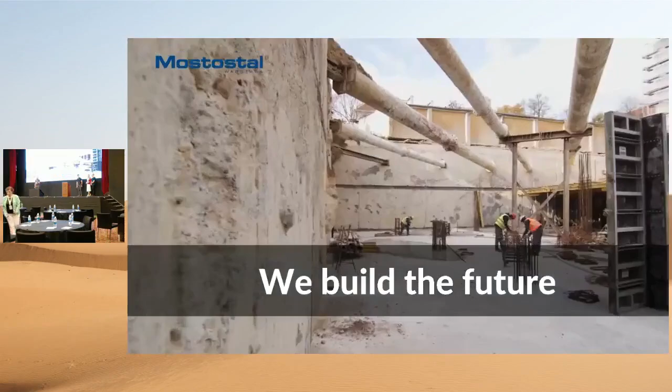We represent a construction company called Mostostal, which undertakes all types of construction projects. Our motto is "We build the future," which we realize through the implementation of digital tools and execution of European research projects. Our company's fundamental values are innovation, safety, and teamwork. And all these values were taken into account in the projects we are discussing.

To develop our solutions, we worked for over 3 years together with experts in different fields. The entire project was coordinated by Universidad Politécnica de Valencia, and our role was to prepare requirements from the end-user perspective, prepare IFC files, carry out the demonstration, test, and validate the technology.

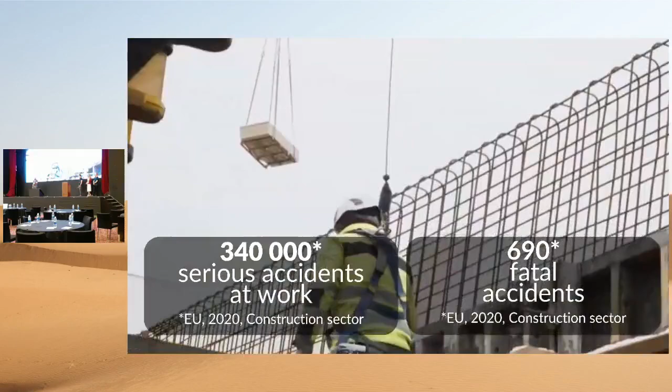The construction industry is one of the most dangerous sectors with very high numbers of serious and fatal accidents. A construction site is a dynamically changing work environment. Additionally, due to high numbers of frequently rotated workers, it's very difficult to supervise them. Our goal was to develop a tool for continuous monitoring of construction site safety, providing alerts about potentially dangerous situations. We achieved that by connecting BIM models and information about the currently dangerous zones with an Internet of Things platform and implementing AI.

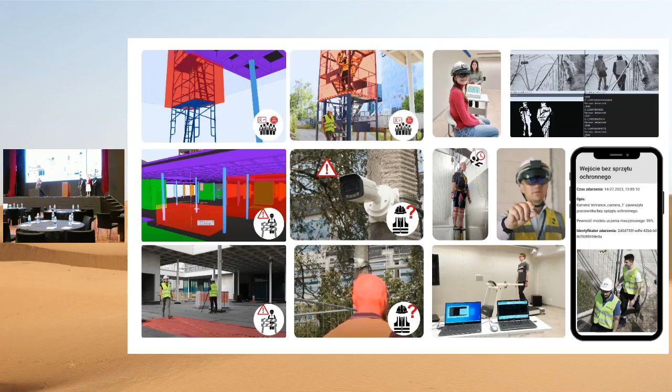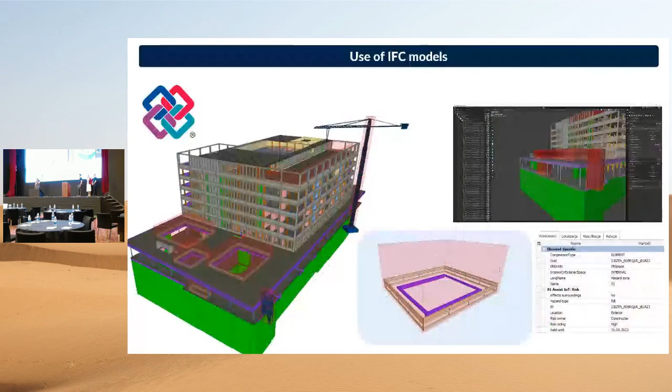Before we cover our use cases in detail, let's move to our construction site in Warsaw. This contract had very extensive BIM requirements from the investor. We had to rely on buildingSMART standards, which are the foundation of our digital strategy. Thanks to openBIM, it was possible to develop such ambitious and complex solutions for health and safety. We use IFC models for classification developed for this project, including, for example, hazard types. We use point clouds and 360 photos to create as-built documentation and models. To maintain the quality and accuracy of the model, we utilize communication in BCF format on a CDE platform.

It's standard practice in our company that we implement on each construction project a CDE platform for health and safety reporting. Based on the collected data, we display it in Power BI, and thanks to this, we can conduct analysis and draw new conclusions related to health and safety. And now, here's Witold to tell you more about these activities and other use cases on this project.

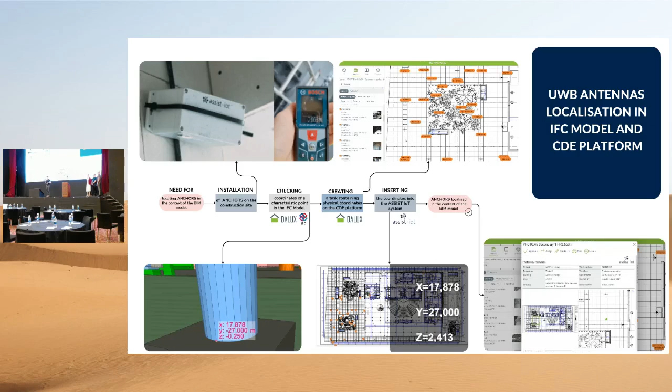Thank you. So I will continue by showcasing how we went above and beyond in creating our innovation. Our use cases are a direct response to hazardous situations present at construction sites. And of course, at the core of the Internet of Things is the hardware. We developed custom equipment that computed data from sensors at the construction site. We processed real-time images from a camera, for example. Additionally, we used ultra-wideband antennas for the localization of incidents. Here, the combination of physical measurements and coordinates read from the IFC model and tasks in a common data environment allowed us to have a localization system up and running.

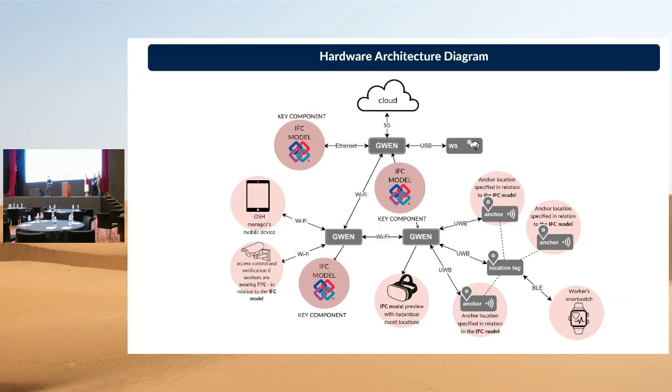All workers were equipped with a location tag, as well as a smartwatch that served as an interface for worker-specific alerting. And for the OSH manager, there was a dashboard created for a tablet where he received all the alerts. Of course, connectivity and software integration of these tools were established to then create one Internet of Things.

And now moving to particular use cases. To assure workers' health and safety, we measured the pulse of the workers. In case of abnormalities, both the worker and the OSH manager were alerted. Here, importantly, the alerts contained the location of the incident as well as the affected workers' data.

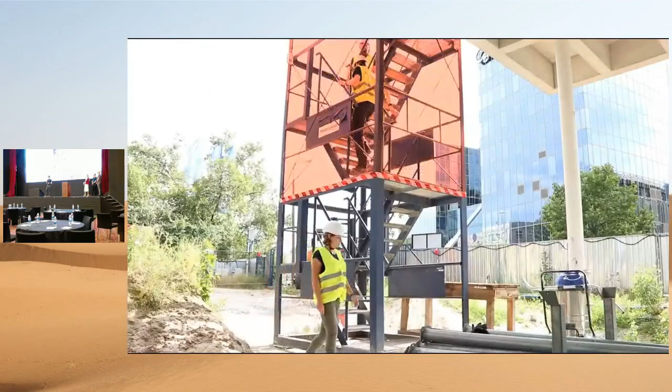We were also able to detect entry into modeled danger zones. The integration of IFC danger zones parameterized with type of danger as well as validity date allowed us to inform workers about the active dangers present at the construction site. Here, to further streamline the process of modeling danger zones, we modeled them natively in IFC. This was important to keep the models up to date.

We successfully used freeware here, exactly BlenderBIM Bonsai, and then thanks to open collaboration, an application was developed which allowed creation of zones on a tablet, also with direct integration to the Internet of Things. As an extension of the geofencing use case, we were able to check workers' permissions upon entry into a zone.

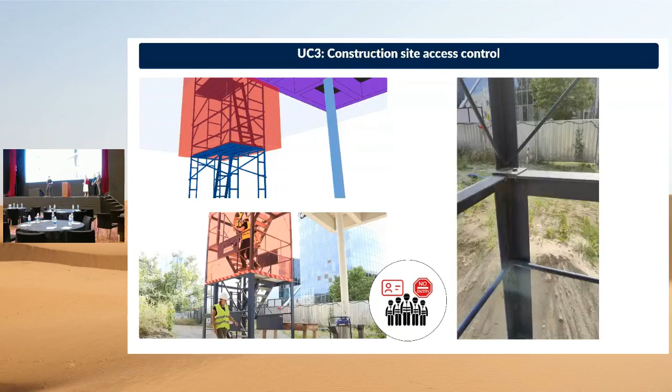Also, thanks to a camera capturing pictures at the construction site and a custom AI algorithm, we were also able to detect workers entering construction sites without a protective helmet. Here also an alert was issued. One of the challenges that we encountered was the algorithm having problems with differing between a bald head and a helmet, but we fortunately overcame that.

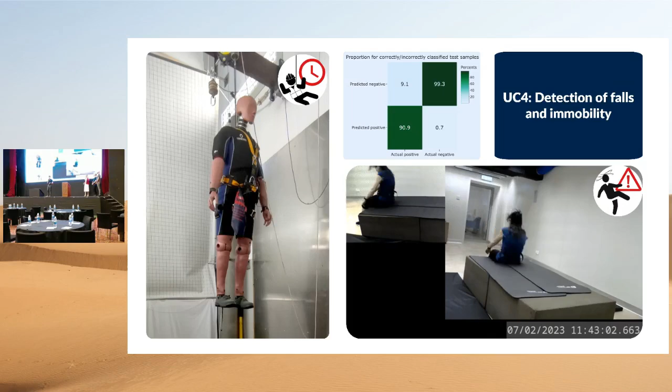Thanks to an accelerometer integrated in the location tag, we fed and trained an AI algorithm for fall detection. Both falls from height and falls from the same surface were detected. And here, crucially, both neural networks and knowledge graphs were used to provide a reliable algorithm.

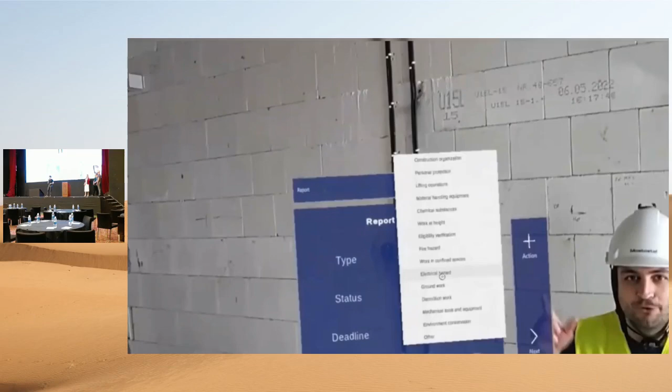Then, as a further step in digitalization, we moved report creation to an augmented reality interface. This was, of course, conveniently integrated with the localization system and the IFC model. We also explored marking an evacuation route in an IFC model for the AR interface.

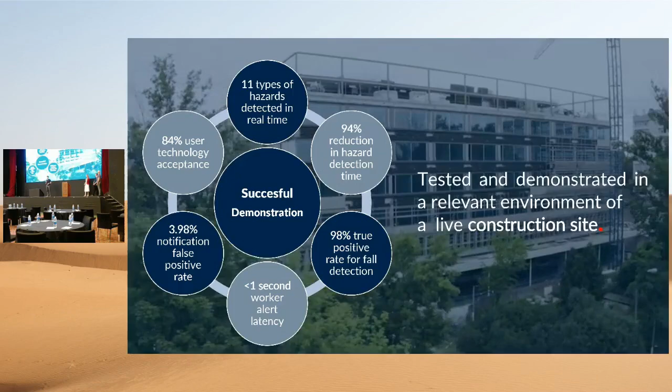So, in summary of the use cases, we tested and demonstrated our solutions in a relevant environment of a live construction site. We achieved high user technology acceptance, low latency, and low false positive rates. We successfully proved the concept of an IoT utilizing integration of an IFC model for the real-time support of occupational health and safety.

And by implementing open standards every step of the way, including openBIM, but also open standards for connectivity, for software creation, we assured high scalability. This means that this platform that we develop could be easily extended for any other use case. Now I'll give floor to Agata.

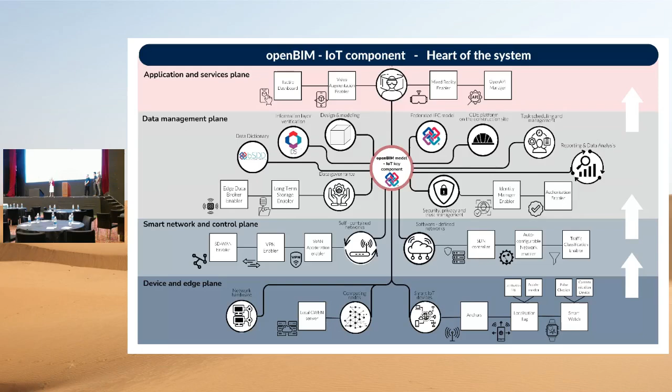The openBIM standards were applied across various areas of the project, including design and modeling, the use of CDE platform on the construction site, as well as mixed reality. Especially the use of BCF, bSDD, and IDS were triggers that powered the IFC model of the building, functioning like one of the heart chambers.

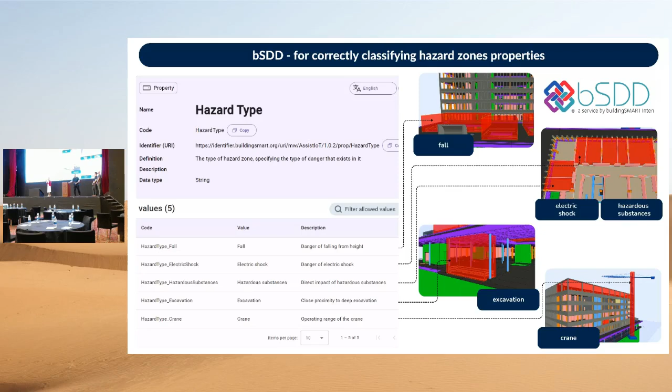In the model, we included elements typical for the construction site environment, focusing on hazard zones. Here, the bSDD service proved helpful. By creating our dictionary, we ensured that all model elements were correctly classified. Properties assigned to all hazard zones, crucial from the perspective of construction workers' health and safety, included, for example, hazard type, valid until, and risk rating.

We used Akka bSDD editor to create our dictionary that we then uploaded to the bSDD service website. The publication of the bSDD allowed Mostostal Warszawa as the first organization from Poland to appear on the list of entities using the bSDD service. At the moment, we have 5 different buildingSMART data dictionaries published.

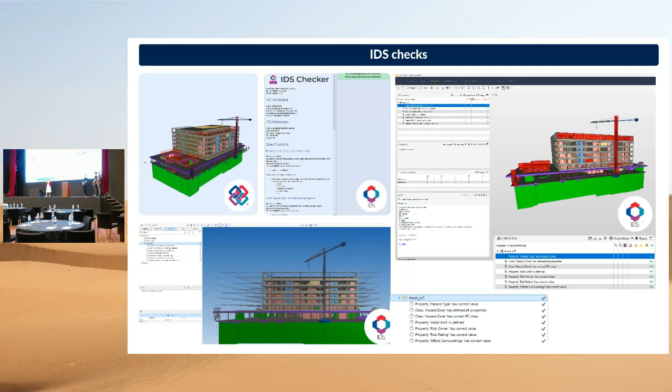The information layer of the IFC model was then verified using IDS specifications. In the process of creating IDS, we directly referenced classes previously created in the bSDD. For example, we checked whether the hazard type has the correct value from the list of hazard types, and also if the hazard zone has its duration defined.

Different IDS files were then uploaded into different software, BIM Vision Program, Solibri Office, and BIMcollab Zoom, providing us with verification reports. Heading towards the conclusion, we have transitioned from OSH reporting on paper into reporting it on CDE. And now we are developing AI-based real-time reporting with the use of augmented reality. None of this could have been achieved without the use of openBIM. That makes the solution open and accessible.

But what is the significance of our project that makes it not only a research work, but also a research work with a very concrete, practical, and implementation dimension? This is what Dawid will introduce you to.

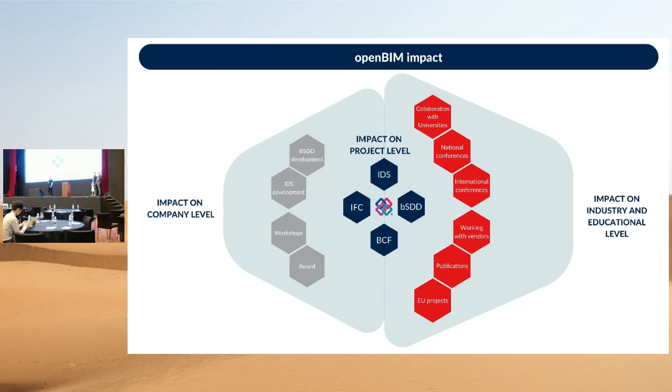So by placing openBIM standards at the center, we brought many benefits on project and company level, including developing bSDD and IDS for other projects also.

At the educational and industry level, we contribute to the Building Smart Poland annual report and the Collier's report addressing digital sustainability challenges. Also, the project resulted in many interdisciplinary publications, bringing in meaningful academic results.

For many years, we are involved and focus on transferring practical knowledge to the students. We organize workshops where they can use our IFC models, and we like to teach them about openBIM standards used in practice.

We presented achievements at both national and international conferences. Also, we actively promote the use of openBIM standards in the Polish market, and we work together with software vendors to create and improve better software for all users.

Key openBIM outcomes cannot go hand in hand without addressing sustainability aspects. We align our solutions with 7 of them. In conclusion, our project supports both research and practical benefits, for example, open access to results, gender balance in research, and impact on high-quality education.

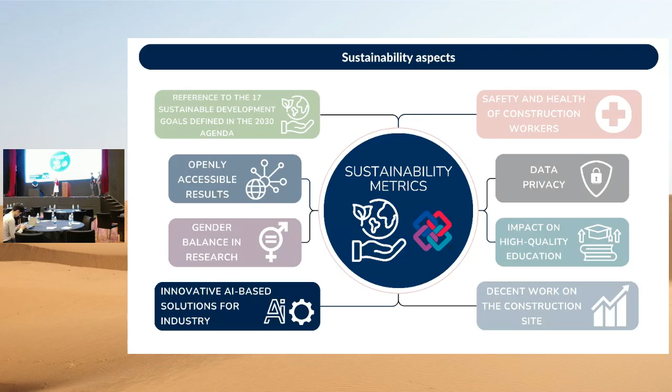Sustainable development in the context of the built environment is widely understood as recycling and reuse of building materials. Nevertheless, it must be highlighted that it is humans that sustainable goals are aimed at and for. Construction workers' safe and decent work on the construction site that the project contributes to are directly aimed at construction workers, that is, at humans, their health and their lives.

Thank you very much for your attention.

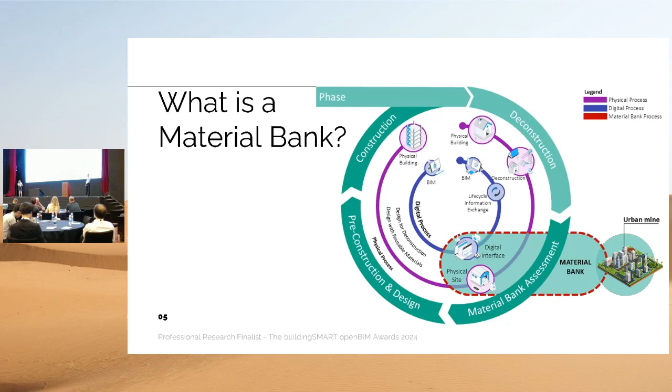But also on the digital side, we want to communicate this information to designers, practitioners, and contractors to be able to find these reusable items and use them in their projects. So we need visibility. This project actually started 6 years ago.

So in 2018, BIM was still a little bit new. And we asked a futuristic question, how to connect the building information model to a material bank. And that was in 2018.

We didn't really have an information model for this use case. We also didn't have a material bank. We just knew that in the future, designers are going to consult a material bank and find reusable elements from them to put them in their BIM model to see if it fit their design.

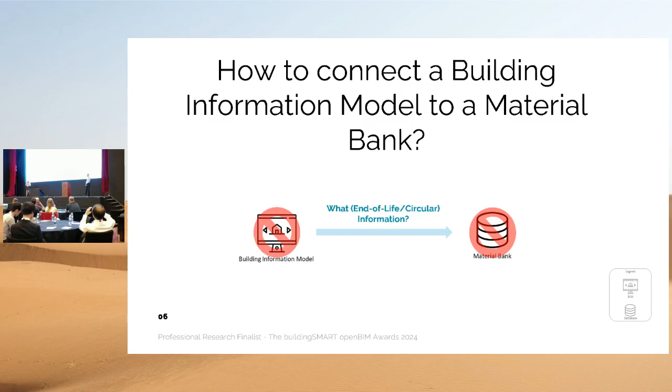On top of everything that we had or not had, we didn't even know what information we should communicate in between these two platforms. So I started to look at different material banks in the industry and also in the academic literature, and I saw that the same siloed approach that was very prevalent in the energy domain is filtering into sustainability and circularity domain, because there are a lot of ad hoc one-off solutions that are not reproducible, they are not standardized, and they are not interoperable.

Also, there were a lot of dependency on closed BIM approaches and closed BIM software. So even if there were material banks, they were communicating information only with a certain software and the native data from that software. In case you have three different material banks in one city, those material banks were not communicating with each other. That's why we have openBIM.

But even at that time, the data structures were not supporting circular information or end of life cycle information. So the next step was to focus on how to define reusability.

And there was a lot of confusion, it still is, about reusability. Sometimes when we say something is reusable, we're actually talking about something that is in the current building stock, so we want to design with the existing ones. Sometimes we say something is reusable and we're actually referring to something built in 2024 to be reused in 2080. So there's a lot of confusion about this term and how to untangle it.

Then the next confusion was that there was a lot of good early research, but it focused a bit on short-termism and indexing things. If you're familiar with ESG, you know we have to move toward more long-termism approaches. For example, if you say that this chair is 76% reusable, you really don't understand which part of this chair is reusable and how to achieve that 76% reusability and not drop the percentage.

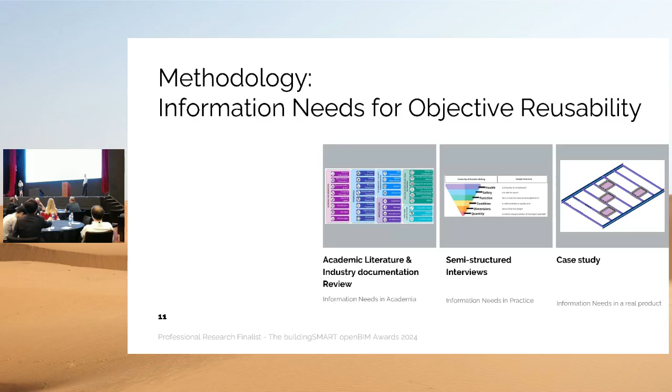And the idea was to look at information needs and requirements so that we could objectify reusability, establishing a common language between us. And we started a three-part methodology that was quite iterative.

The first one was academic literature review. It's a very comprehensive review, and we noticed that there are a lot of properties that are the same for conventional materials and reusable elements and materials, but also new ones.

Probably the novelty of our work is that we are relying on a lot of established industry standards, especially the upcoming ISO 59040, the product circularity datasheet. If you're in the domain, you know it's going to be published very soon. It established a minimum standard for what information needs to be there.

The reliance on these standards was because we wanted to make sure that whatever we're proposing today is going to be usable for the next 10, 20 years, and the terminology is understood not only by us but also by future people. In case there is data obsolescence in the future, the terminology can be traced back and people in the future can understand what it is.

The next step was an interview with industry experts. The interviews were aligned with ISO 29481 because we wanted to produce some process maps and explain how these things are done in practice. And it resulted in this taxonomy.

So this taxonomy was first translated into a linked data ontology. You can see that this taxonomy is very well linked because the idea was to move away from binary dead ends where you say something is reusable, yes or no, and make sure that information has chain axioms.

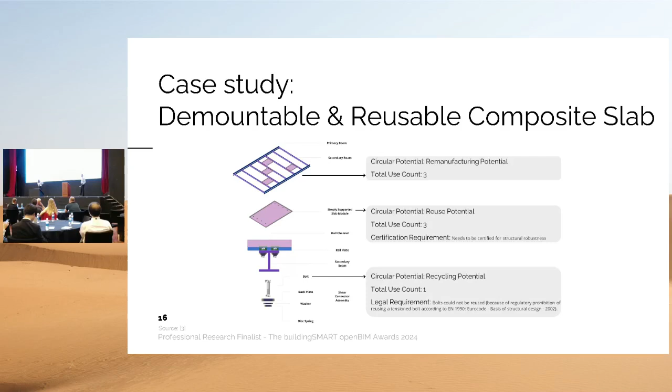That's because Eurocode doesn't allow pre-tension bolts to be reused for a second life cycle. These are the kind of information we really wanted to capture, instead of saying something is 76% reusable. So this was our case study, and now I'll move it to Vitalij.

Thanks, Arghavan. We met at a BIM event, an online BIM event in Liverpool, and I saw her research, which was great. It had taxonomy, ontology, but it was probably a leap forward for construction to be used on day one. So we had a brief conversation, which led to a 6-month ongoing collaboration, with the first outcome being a data dictionary, which is now published on bSDD, and was actually used by someone in the previous presentations, which is great. It's objective, machine readable, has data types, many things.

But most importantly, it's one of the first data dictionaries that looks at end-of-life properties that can be used by industry professionals. At the same time, we thought it's great having bSDD published, but we need the practical application. So we looked at an array of software applications just to prove this concept could be implemented using today's software solutions.

So we mimicked the project in Revit and enriched the data using the openAC plugin, then exported the IFC, used the BIM validation services by BuildingSmart to check the syntax etc., and pushed all the information into Blender BIM to check the results.

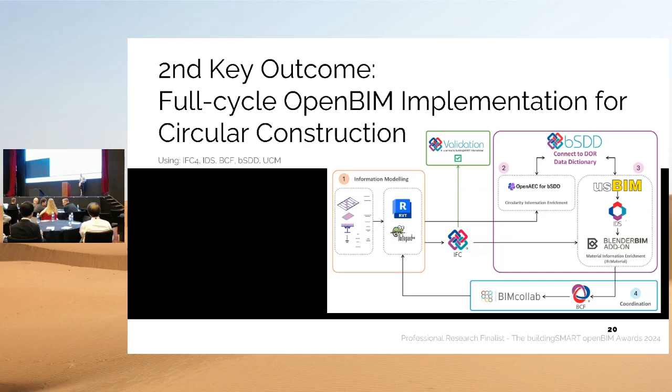In addition to that, prior to that, we also created an IDS where we used the usBIM platform, where we connected to bSDD to use the same definitions etc. Now, all the discrepancies were communicated using BCF file format, using the BIMcollab plugin.

Now, this is a video just showcasing what has actually been done. But while it rolls, I would like to pick on a couple of challenges that we came across.

First was actually translating the linked data into bSDD or IFC terminology. For instance, if you think about a functional layer, which could be a facade, it can't be represented in IFC quite easily. You need to concentrate on the separate entities like walls, doors, windows etc. So we had to IFCify it, if you like.

We also came across some technical challenges. We can define dynamic properties, we can describe materials to the nth degree on bSDD, and we can apply properties to different entities. But it doesn't necessarily translate quite easily into BIM authoring software tools, at least not yet. Hopefully it will be sorted by software implementers in the next couple of weeks, maybe months, maybe years.

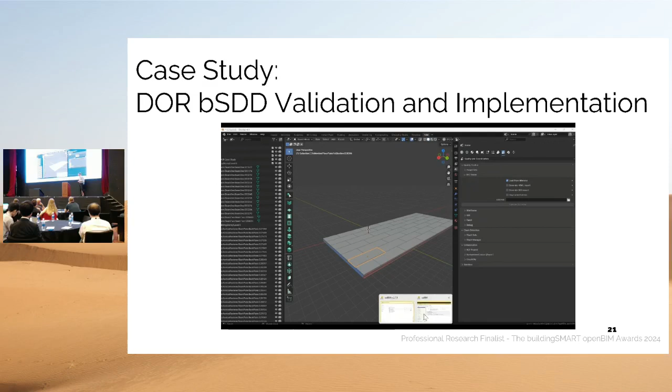We obviously used IDS, everybody loves it. But most importantly here, we thought this is great, but we need an approach that is actually translatable to the rest of the industry. So Arghavan took a lot of her research and pushed it onto a use case management platform, so the industry can actually implement these workflows.

Thank you. So yes, thanks to buildingSMART Benelux, we provided an IDM and UCM. It supports 9 different processes sequentially, but also supports both design for reuse and design with reusables. Everything that I said at the beginning is now solved by this entry.

We'd like to conclude our presentation with some openBIM elements and benefits. As we suggested in the title, we wanted to make sure that terminology, data, and processes are standardized. We wanted to enhance semantic and technical interoperability and move away from information silos. More importantly, we wanted to provide a robust and solid infrastructure for other projects, as you saw earlier, that use bSDD, so they can advance in their own way and contribute to circularity and sustainability.

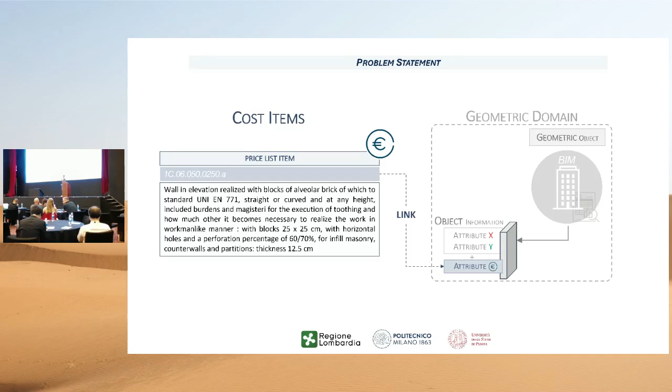Nowadays, the only way that we have in our commercial 5D BIM tools is to link this code of our cost estimation in natural language to the geometrical model through an attribute and put different codes into this BIM model. This causes a lot of problems because there are a lot of manual tasks, error-prone and also time-consuming. As I just said, nowadays we have these attributes that contain a lot of code, and for a machine it's impossible to understand the data and also validate this data between two different domains.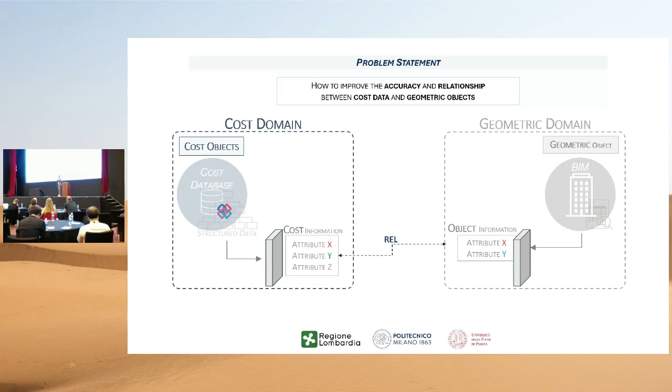The aim of this research is to improve the accuracy and create a more structured and more granular cost architecture based on a standardized way, and also create a real relationship between these two domains: the cost domain with a standardized structure and the geometric domain. The aim is to develop a digital platform that ensures the relationship between these two domains, but also ensures future validation and compliance checking of the information during the cost estimation processes, and obtain a new enriched BIM model with cost information, not only geometrical information.

Moving on then to the cost domain. As we know, nowadays the descriptions of our cost items are only in natural language. We can see that this information is not linear and is scattered. We have a lot of information related to the work, resource, activity, and technical specification in the same description. This is completely not understandable by a machine, and it's very difficult also for the users and practitioners to understand the real application of this cost item in the cost estimation.

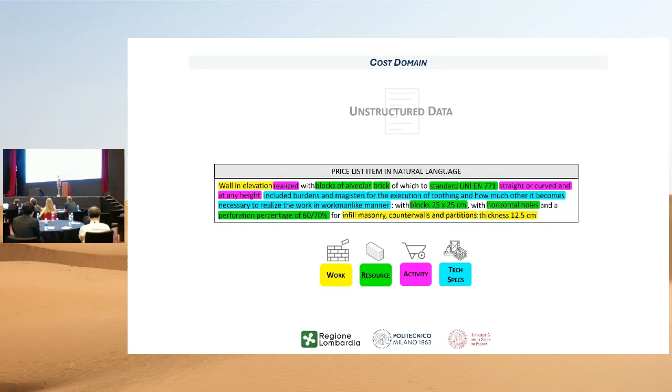The first way is to try to standardize this data and structure it in a new cost structure. We developed this new structure based on two different parts. The first part is the work, that is related to the physical entity and can be related to the 3D BIM model, but also the activity, that can be related to the time schedule. And so we can validate not only our geometrical model, but also the time schedule.

First of all, we define this new standardized cost structure domain based on several relationships, and in parallel, we try to translate this new standardized domain in IFC format. We can see that we have the IFC cost item entity that can describe all this data, and also describe all this data through the relationship between different information.

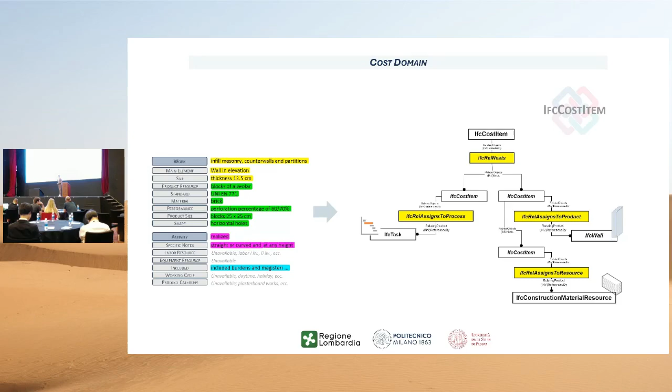We can also relate and nest different cost items into the main cost item, and also relate this cost item to unitary tasks and a sample element. We can put all this information into a set of attributes for each of these information, and structure the cost item not only with a simple description, but with a more complex architecture.

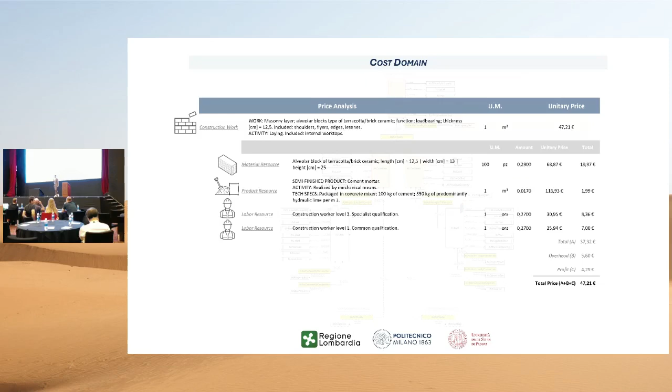As we know, each cost item related to the construction work is based on a price analysis. With this new structure, and also with this new entity present in the IFC standard, we can also structure this price analysis based on several cost items nested into the main, and also define a clear and transparent price analysis, understandable also by a machine.

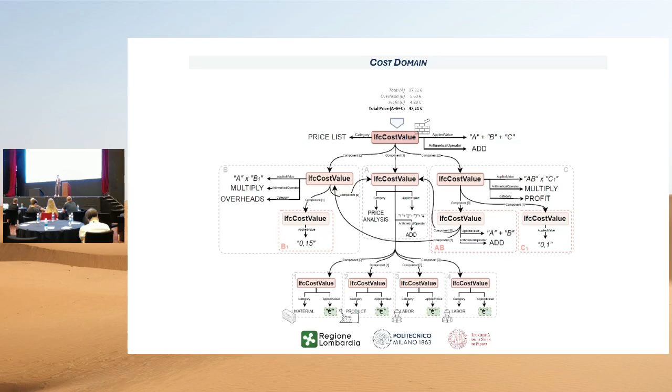We can also structure not only the information related to our cost item, but also the cost value related to each of these cost items. We can start with the definition of the cost value of our elementary resources, material, labor, equipment, product, and so on, and then up to the definition of our final cost value related to the construction work, with the relation with other cost values such as overheads, profits, and so on.

The construction cost estimation process with this new standardized structure based on openBIM classes also ensures a real relationship between the geometrical object and the cost entity. We can also create new cost entities into the model and enrich our BIM model with the cost information. We have the cost value that can be inherited from the cost database, and also the physical quantity of our cost item useful for the definition of the cost estimation, derived from the original physical quantity of our element.

Also, this new structure and this new relationship between the cost and element ensure the possibility to group these cost items into a cost schedule that represents our cost estimation. We can define not only a single cost estimation in static documents such as PDF or Excel, but also a partial view of our cost estimation, such as the cost estimation for the laying of the rebar, concrete, and so on, and then group this cost schedule into a final cost schedule related to the entire IFC project.

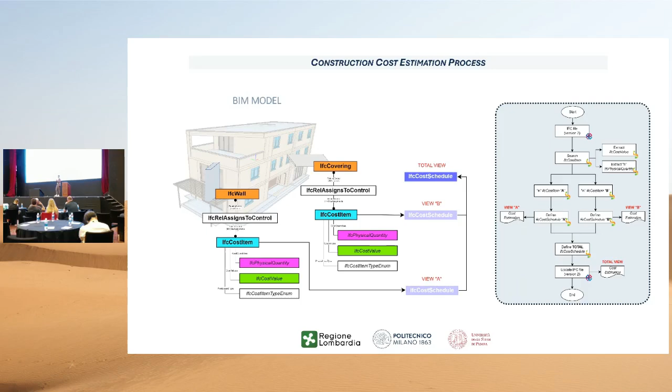The last part is the validation system compliance checking. It is divided in two parts. A first validation using the IDS, information delivery specification, that can be done in the first part of our work, before the definition of our cost estimation and the creation of this relation between cost item and object element. We can check and validate the model that we received, and try to understand if the model can be used for a correct cost estimation.

The second step of our validation and compliance checking is based on a new code developed by the research group that can also ensure the validation between the cost item and the geometrical element. This is completely different from the current validation system, because we only have the possibility to validate the information in the same domain, such as clash detection. In this way, we have the possibility to validate the information between the cost domain and geometric domain.

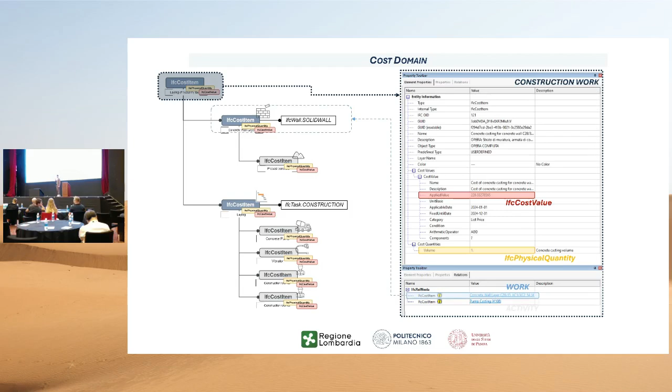Moving on to the results, we can see that this new, more complex and standardized structure of the cost item can be visualized using a commercial IFC viewer. All the information can be stored into each of these entities, and we have a more complex architecture, readable and understandable also by a machine. Here we can see all the connections of the IFC cost item based on the logic of price analysis. Each of these entities contains the cost value, the physical quantity, and also the relation with other entities.

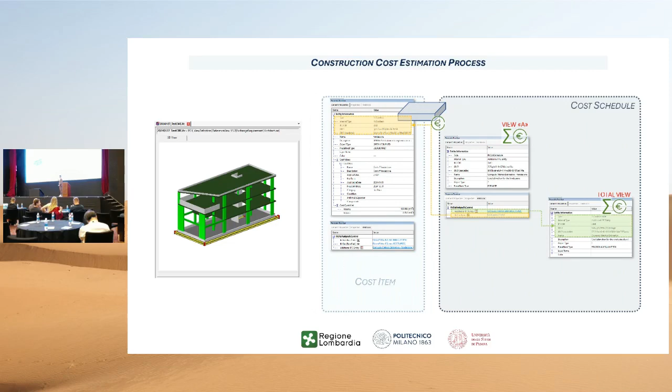We can also group these cost items, as we saw before, into a partial view of our cost schedule and relate this partial view to the entire cost schedule, which can be related to the previous cost schedule, but also to other cost schedules and to the entire IFC project.

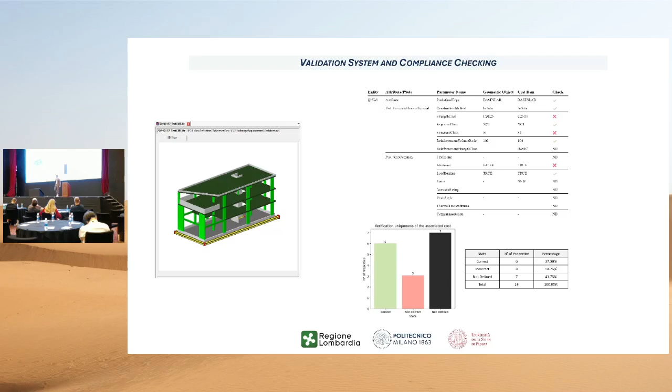And when we receive back the new geometrical model with the correct information, we can also create our relation between the data and also validate this new IFC model enriched with the cost, with this code developed by the team. We also have the possibility to view the report of the accuracy of our cost estimation and also validate this relationship.

In conclusion, as we know, IFC is considered nowadays as a snapshot at a point in time, as a static reference. And with this project, we want to ensure the possibility to consider IFC not merely a snapshot, but also a digital environment that we can use to connect and relate all this information, such as the cost information, the technical specification, the geometrical information, and so on, to ensure correct relations and also a dynamic environment for all these data in openBIM format.

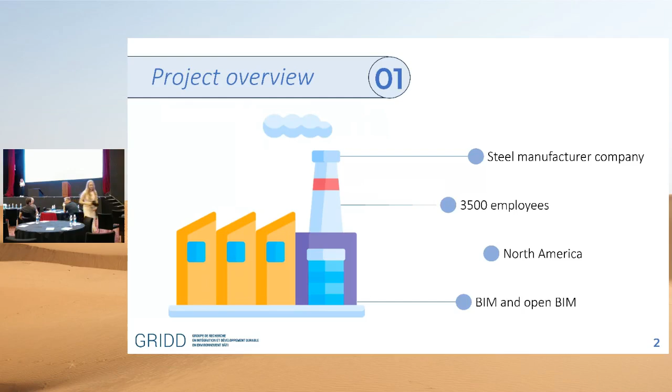some interoperability issues. So to overcome those interoperability issues, we decided to implement new openBIM standards in addition to those they were already using. So we decided to work with use case management, information delivery specification, and the buildingSMART Data Dictionary.

So we first had a look at the use case. We asked ourselves, could the use cases help our collaborators to better understand BIM and to standardize our information? So we began with the identification of 20 manufacturer use cases in order to create a manufacturer use cases database for a project. Then we developed and tested a use case identification workshop to involve our collaborators in the project.

We then tested the workshop and made our collaborators identify 17 use cases specific to the company. We then validated those use cases by a survey and developed a use case template in order to document those use cases. And inside this use case template, we included an IDS section to link those two concepts, to give more meaning to the IDS standard for collaborators.

So after that, we looked at the IDS standard. And we also asked ourselves a second question: could IDS capabilities be augmented by the bSDD? So we first established a test plan composed of 3 steps. The first step was to develop simplified IDS, just in order to understand the concept and to be able to produce IDS that were actually working.

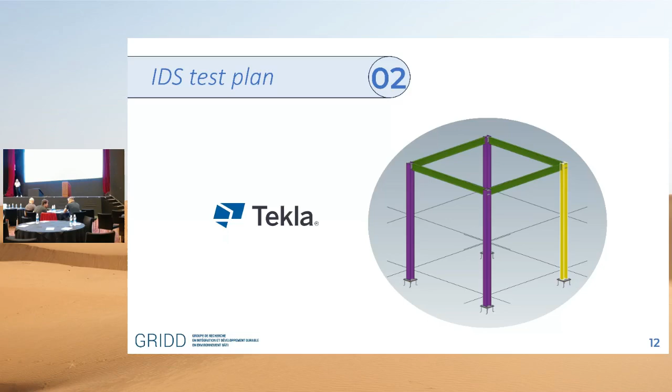So for the code, we compare IDS that weren't developed with bSDD and IDS that were developed with bSDD. And we did the same for the check capabilities comparison. In order to test our IDS, we use a model that has been modeled in Tekla and then exported in the IFC format. So, as I was explaining, for the code comparison, we compare IDS with bSDD to IDS without bSDD. And we also compare the code produced by two different software, Plannerly and buildingSMART IDS editor.

We did the same for the check capabilities of IDS. Again, IDS with bSDD and IDS without bSDD. We compared the result of two different software, BIMWorks and buildingSMART IDS. So here you can see some results of our IDS checks. You can see that we develop IDS for three different projects: Beam, Plate, and Bolt.

And with IDS, we were able to find those problems in about, I don't know, maybe 20 seconds. And it was a very, very small model, as you were able to see. So imagine with a much bigger model. So it's a very useful tool.

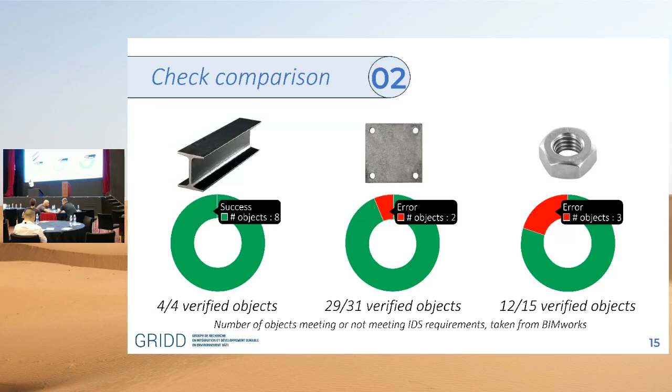What about our outcomes? So during the test phase, we developed 81 IDS. So we are talking about 3,747 rules that were tested with three different software. And as final outcomes, we developed an IDS catalog composed of 103 rules for Beam, Plate, and Bolt. And we also defined some recommendations about IDS development.

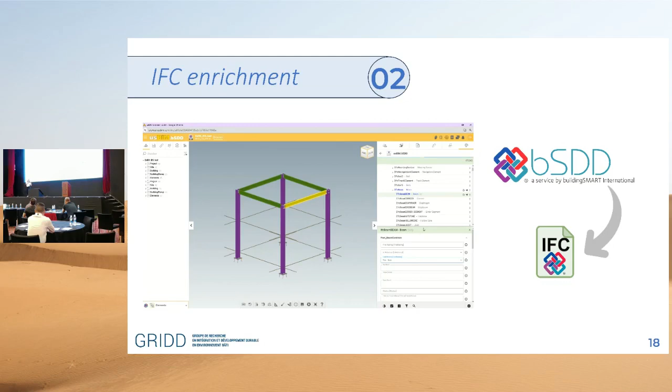So after that, we looked at the use case standard and the IDS standard. We asked ourselves, could we use the bSDD on a larger scale inside our project? So we looked at the IFC enrichment part. So we enriched different IFC models using buildingSMART bSDD. So during the test phase, 54 data have been enriched in different models. And as final outcomes, we enriched 25 in one IFC model in order to test our final IDS catalog.

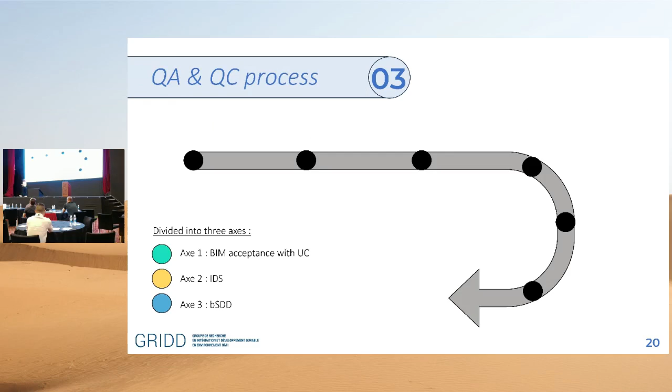So now you may be asking yourself, where has all of this led us? That's an excellent question. So if you can remember, we first looked to improve the user awareness. Then we made them identify some use cases. Based on those use cases, we defined our information requirements. We then translated those information requirements into IDS, and we checked our models with those IDS. And finally, we enriched our IFC models if it was necessary.

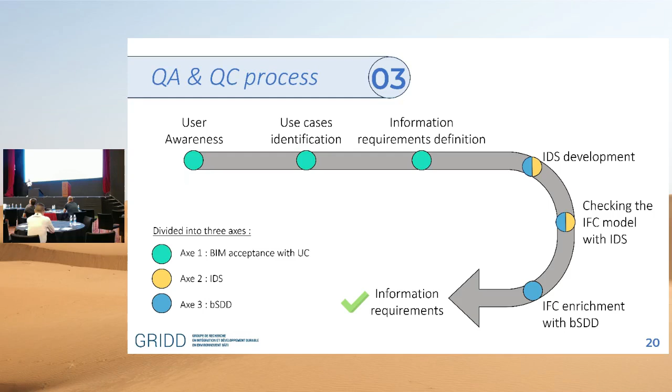And all of this was in order to check our information requirements using three different openBIM standards: use case, IDS, and bSDD. What about real life? That's a good question too. So we imagine the client will define the use cases and the information requirements for the project. Then, based on that, the BIM manager will be able to select the appropriate use cases inside the use case catalog with already some indication for the development of IDS.

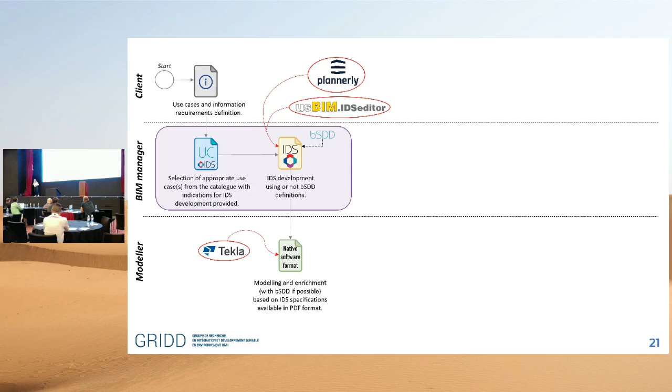Then the BIM manager will select the appropriate IDS inside the IDS catalog or develop some new IDS using, for example, those tools. Then, based on this IDS, the modeler will model the project and export it in IFC format to check it with IDS. Then he or she will ask, is the property, material, quantity, or attribute existing? And is the data being provided? If not, we can directly enrich our IFC model, for example, using buildingSMART bSDD.

If the property, for example, is existing, but the data has not been provided, we go back to the step of the native modeling to enrich the model. And if all the information has been provided, we can send the IFC model to the BIM manager, who will recheck the model and ask the same question. Are all the requirements verified? If not, the modeler should do something. And if yes, we can send the IFC file to the client.

So this proposed process was developed to be adapted to different companies and to be improved. For example, we didn't mention the use of the BCF format, but it could be integrated. We can imagine some comment exchange between the BIM manager and the modeler. And that's why we chose the software, because they all support the BCF format.

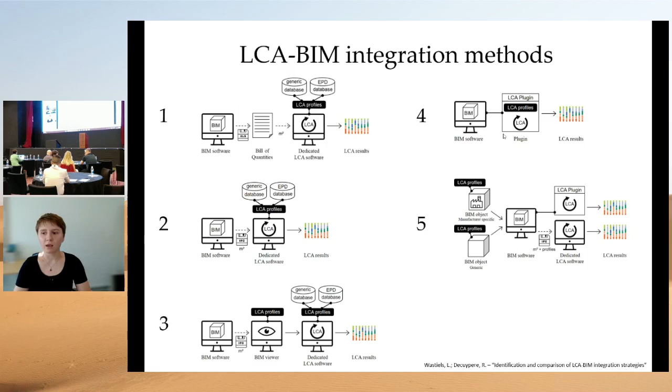I identified that most of them rely either on self-made solutions, that is some custom scripts or tools, or proprietary solutions, which often lack the transparency of the method. Common to all of these is a lack of standardization, a lack of long-term sustainability of this data, and a lack of connection to the underlying standards.

So with my solution, I tried to focus on containing all of the data except the calculation itself inside the IFC model. This was to create a single source of truth for LCA, and also use the IFC model as a long-term storage for the EPD data and the results. So the focus of the project was more on creating a systemic solution rather than simply just a calculation tool.

As mentioned, there has been a lot of research on the LCA-BIM connection, but much less on the LCA and IFC specifically. But here are the 5 primary sources that I used for my research.

The central dilemma in all of these was: should the environmental product declaration data be stored inside the IFC somehow, or just be referenced as external files, typically using a unique identifier, the UUID? I identified when we're talking about long-term storage, that is storing data for 20 or 30 or maybe even 50 years, this connection can be a bit fragile and problematic because there is not clear responsibility of what happens when the links get broken and who is hosting this data.

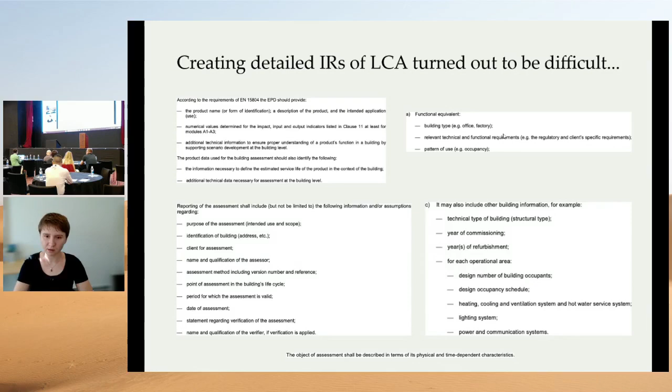So I started by compiling a big spreadsheet of the different sources, and I expanded my search to other sources such as other standards, guides, programs, and, for example, the EU framework levels, and many more sources that are not part of this final spreadsheet.

And at this point, I also realized that there is, in the literature at least, a big difference between the building level information and the product level information or data. On the product level, we have some better, more detailed sources, such as the ILCD plus EPD format. And on the building level, it was a bit more vague and difficult to find something.

While I was compiling this information, a clearer picture began to form of these connections between the core standards, but I still had two main issues. One was the information requirements on the building level, as mentioned, and I was addressing this with my big spreadsheet, trying to create consensus among the existing sources.

The other one was how to store the EPDs, even if they are in a digitized form. What should the connection be between them and IFC? Here I did analyze the different solutions that others had gone through. For example, implementing them directly as property sets, using APIs or UIDs as external connections, or linking to other formats as XML or JSON. But it wasn't really a native IFC-nice solution.

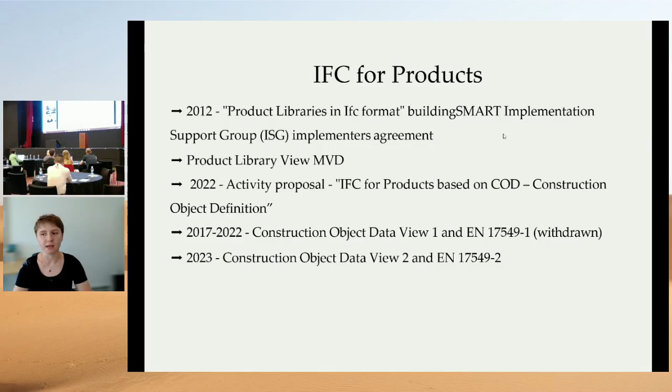And it seems like they all culminated with this Construction Object Data View project, which was started in 2017 by the CEN 442 BIM committee. In the original proposal, they identified the issue that right now, if a manufacturer wants to provide a product in the IFC format, they typically create an empty room in a random location, often Boston, and they place the product in the middle of that room, which isn't ideal.

So they proposed, in the first version of this project, an MVD which would include a header, an IFC project library with the product data template, and an IFC project with the product data itself. The technical documentation for this was published on bSDD's GitHub page for a long time. It isn't any longer, because this first version was withdrawn as a standard two years back.

But there came a new version of this standard, which focused more on the configurable construction objects and had a very strong connection with data dictionaries, utilizing some complex IFC concepts such as complex properties, declarative expressions, equations, and so on. They also provided an example of a library object in the IFC format, which I also used.

So at this point, while I was exploring these different solutions, I tried also to analyze how they would form a part of a larger workflow and context, so the IFC model is not the only part, but also the requirement definitions and validation with IDS, and the different structures that the data dictionaries look like. I split up the information into national data dictionaries, European and global ones, and how they all could form a part of this workflow.

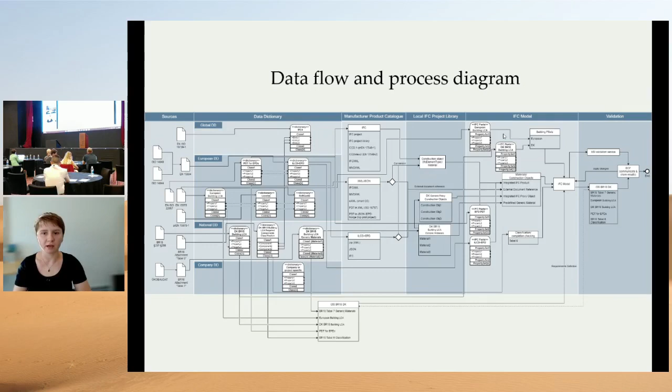This diagram also shows different format possibilities, but as a core it defines the layers of a manufacturer product catalog and a local IFC project library.

So in the final solution, I did end up utilizing COD as a reusable IFC project library product, which could be shared by the manufacturers. And on the other hand, the EN 22057 standard, which defines how EPDs can be described as product data templates and be utilized in BIM. This standard is format agnostic, so it only defines the property and data types.

But for example, EPD Norway made a pilot project publishing some EPDs using this standard in the JSON format. And my solution was to take those EPDs in the JSON format and try to implement it all in IFC.

And here is part of the implementation in IFC. I had a strong focus on finding good, efficient IFC mechanisms to try to represent this information, to limit duplication as much as possible. So for this, I use IFC tables, reusable columns, complex properties, IFC references, and so on.

There was also an in-depth analysis of how different scenarios, such as different future energy sources, can be part of EPDs and represented with this.

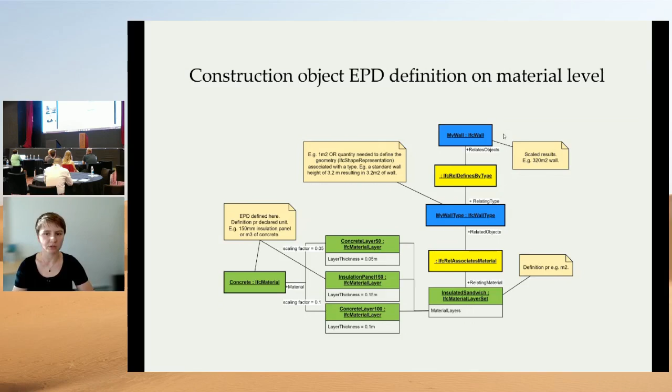Here is an example of defining an EPD at the material level. An EPD doesn't have to be redefined for each element, but can be reused as a material, and it's only the amounts that change on the type or element level.

And that was my presentation. Thank you very much. I am starting a PhD in a bit of a different area, but I can still be contacted on this if applicable. Thank you.

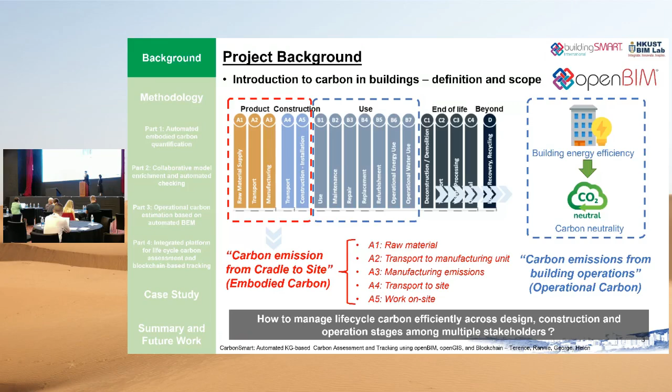And we also find that openBIM can help a lot in these two different stages of carbon management. We also want to know how to manage life cycle carbon efficiently across the different stages and multiple stakeholders. But there are still some challenges now.

For the first challenge, the calculation of embodied carbon is not clear for now. The current calculations refer to local databases, and we also need to know the material quantity and whether the BIM model is accurate or not. That's related to this part.

Also, because embodied carbon is linked to multiple stakeholders like suppliers, contractors, and designers, we need to make sure the data exchange is fluent and the data is correct. So the collaboration part also needs to be discussed.

Then there's the operational carbon part, for the LCA B stage. In this part, we need to use a lot of energy modeling engines or simulation engines. For that, the openBIM format of different kinds of BIM models or different source data needs to be integrated into one format or one platform. And for the last part, we also need to discuss the supply chain, because the carbon footprint needs to be tracked during this process.

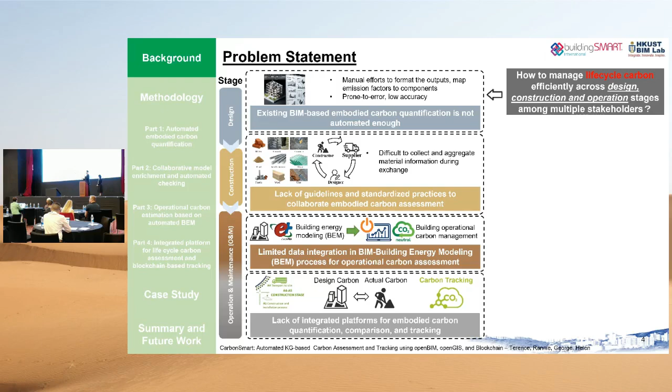And also in the commercial world, data security is very important when we talk about the supply chain. So we use the blockchain for that. So overall, in our problem statement we found out that the blockchain helps a lot during this process, because it has the properties of interoperation and being open and reliable, which can help a lot.

So we developed our own workflows. Let me briefly introduce that part. For the first part, any kind of BIM model, even from Revit or from Bentley, we can convert to IFC files. And based on the IFC files and the developed MVD, we can get the information required for embodied carbon, and based on that, we can quantify the embodied carbon.

And then we also do some collaborative model enrichment and automated checking, based on the IDS and the US BIM or something else. Then for the operational carbon part, we developed something for energy and carbon simulations, for the operational carbon in stage B. And last, we also focused on the supply chain. So I will talk about the first part, automatic embodied carbon quantification, first.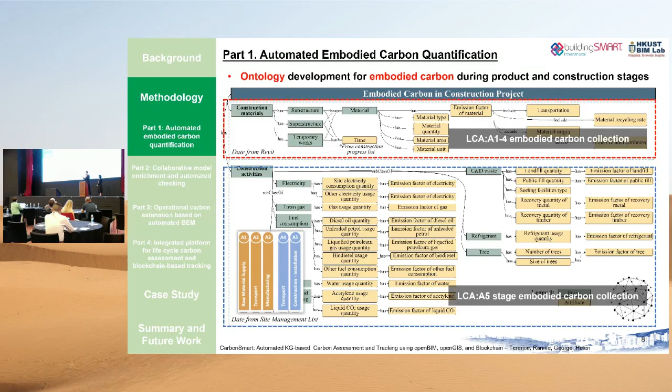In this part, we first developed an ontology for the embodied carbon. Then we convert this to an MVD, which standardizes the information requirements for the IFC schema, and we can get all the information we want for the embodied carbon. Then the data collector for the embodied carbon uses Dynamo, or any other programming language for BIM also works. This way we get the embodied carbon results, and we can see the family types we get in this part.

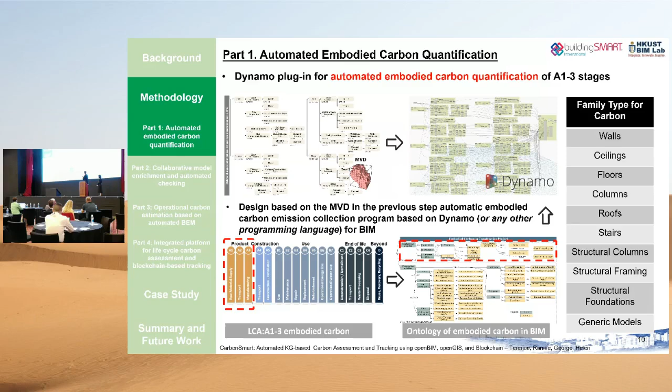And then it's about the collaboration part. For the collaboration part, we first do the BIM exchange process using the IDM. And then we put the enriched IFC files or any carbon-related information into the IFC files and get the final usable data exchange format in IFC, in the openBIM file.

Then the operational part is similar to the embodied carbon. We first developed a knowledge graph, and for the operational carbon, as it shows here, there are 4 different types: the HVAC, the heat, the building itself, and also the weather. These different kinds of data we transfer according to the bSDD, the buildingSMART Data Dictionary, to make sure they fit the IFC format and the other open standards.

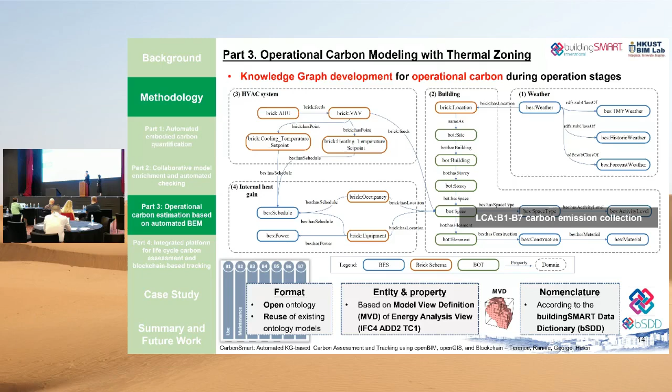And then we use this knowledge graph to get the different information sources and stimulate the engine to get the operational carbon, and support the dynamic data conversion for automatic BEM and operational carbon simulations. We use EnergyPlus and even eQUEST.

And for the last part, the supply chain part, it has 4 different functions. The first one, we use openGIS for the A4 stage, because the transportation in the supply chain needs to be counted as embodied carbon. Also the design and actual carbon comparison and the visualizations can be based on the openBIM and openGIS integrated platform. And the operational carbon simulation is also done in this step.

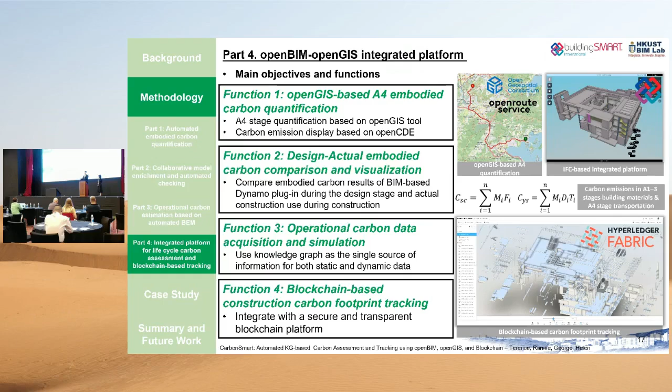The last part is the blockchain-based construction carbon footprint tracking, where we want the carbon data to be traceable to the source and make the result more accurate. So overall, our methodology is a generic method for all buildings, and it has different steps to get the life cycle carbon emissions in construction. We also have some illustration examples, so let me invite Rennie to do that.

Yeah, thanks, Terence. Next, I will briefly illustrate a case study of the O PARK2 project in Hong Kong. This is a special project, since it is the first demonstration project in China to achieve zero carbon during construction. And this project has been completed.

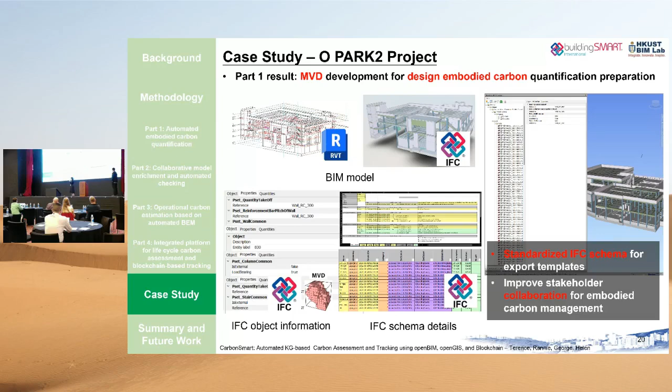During the process, first, we developed the MVD, as we mentioned in the methodology, to extract all necessary information required for design embodied carbon quantification. This slide shows a specified model view and the standardized IFC schema based on the MVD we developed for the O PARK2 project. Then, under the model view defined by the MVD, we developed a Dynamo plugin to automatically quantify the design embodied carbon results. And in this part, there should be a video.

And in this part, the results of design embodied carbon will be generated automatically in Excel format, which will be further imported to our developed platform, CarbonSmart, for assessment and blockchain-based tracking.

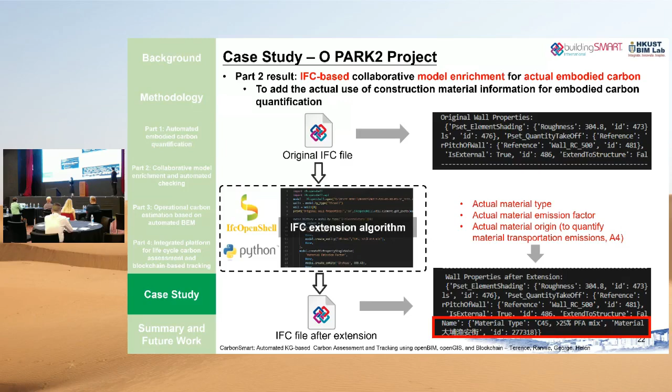And in the next part, here we use the IFC which is generated from the MVD-based extraction to link with model enrichment algorithms to realize IFC extension. And here we can see an example of how an original IFC file is extended based on our developed IFC extension algorithm. From this example, we can see that finally, the actual construction material information, including actual material type, emission factor data and origins, has been successfully added to the IFC file.

And after enrichment, we use the IDS to better specify the data information exchange requirements, especially to ensure that IFC files fully contain the material information required for actual embodied carbon quantification. And in our example, we want to make sure all structural elements have material properties.

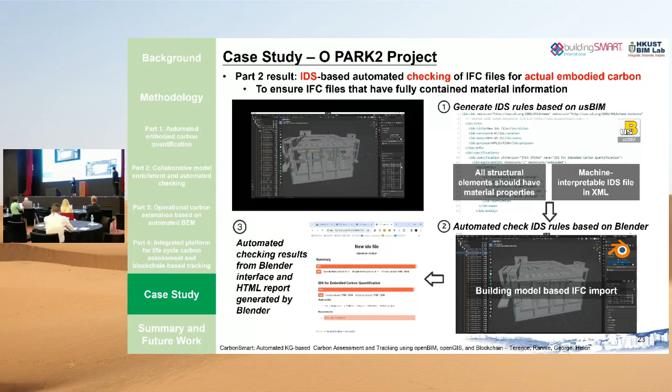So we developed a machine-interpretable IDS file and imported this IDS file together with the enriched IFC in Blender to realize automatic checking. And then we can get the automatic checking results from the Blender interface and also an HTML report generated by Blender. According to these checking results, we added the missing information to improve the accuracy of carbon quantification results.

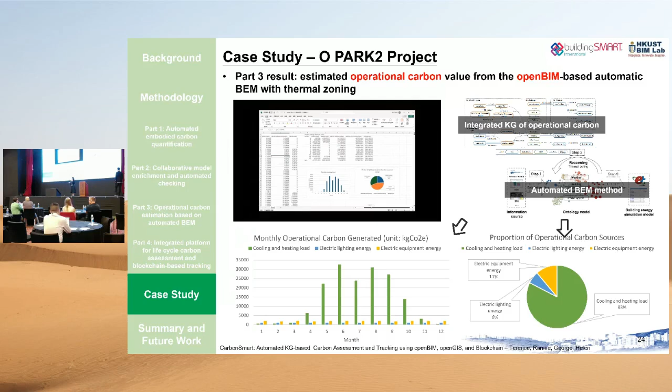And then for operational carbon, based on the integrated KG and the automated BEM method developed in our research, we used openBIM to link IFC information to the energy simulation engines eQuest and EnergyPlus. And finally, we can get the results of the energy simulation as well as the operational carbon estimation results.

And in this part, we also try to evaluate the efficiency of our proposed KG-based automated BEM method. And here we can see that by comparing with the manual building energy modeling process, our method can keep consistency with manual modeling results. At the same time, our method can reduce the BEM model development time by 99%.

And finally, for the supply chain results visualization, first in our developed platform CarbonSmart, we can get the openGIS-based A4 embodied carbon quantification results. By using the GeoJSON format based on the OGC encoding standard, we encode the location data extracted from the enriched IFC. And then by using the OpenRouteService API, we can directly get the transportation distance and also the transportation emission results in this stage so that we can improve green procurement practices.

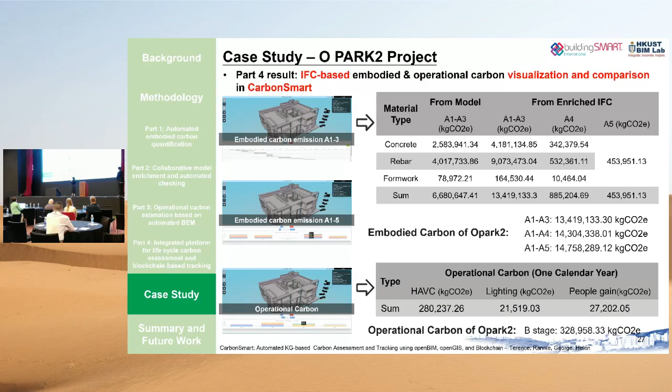And these are the calculation results in our CarbonSmart visualization, including the embodied carbon results and also the operational carbon estimation results. And as I mentioned before, the carbon management process along the whole construction life cycle involves a lot of data transferring. So we also use blockchain to secure and track carbon footprints in our platform.

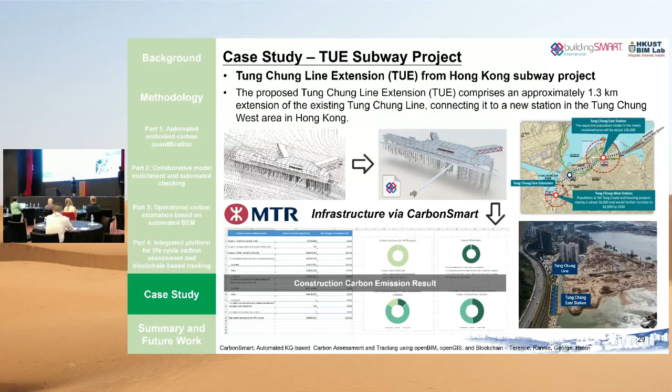And in fact, the O PARK2 project is only one illustration, and our method has also been implemented in other projects, including civil engineering projects such as the MTR project in Hong Kong. Finally, as a summary, I want to summarize the benefits of using openBIM and openGIS in our research.

Using openGIS and openBIM tools helps us to improve carbon management practices along the construction life cycle, especially the use of IDM, ERM, and MVD helps us enable better carbon data management in BIM models. And using IFC and IDS helps us to extend the depth of BIM and also enhance high-quality collaboration among different stakeholders.

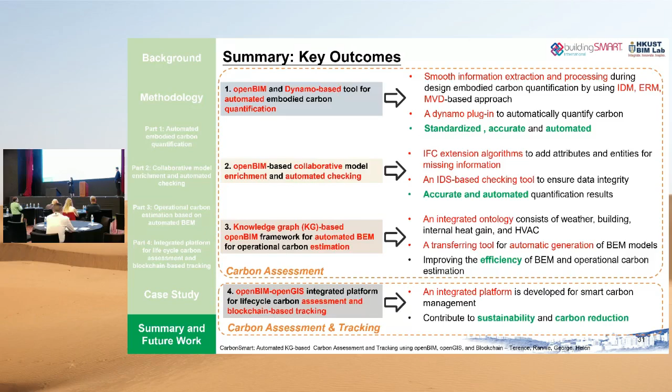And using IFC, MVD, and bSDD tools helps us to enable an accessible digital twin to simulate operational carbon. And finally, openBIM tools also help us to facilitate a common data environment for carbon management software development. And this slide shows the key outcomes of our research. We help to make the carbon management process more standardized, accurate, and automated so that we can contribute to sustainability and carbon reduction.

And in the future, we hope to extend our work to MEP systems and also to more LCA lifecycle stages, including beyond upfront embodied carbon and the end-of-life stages.